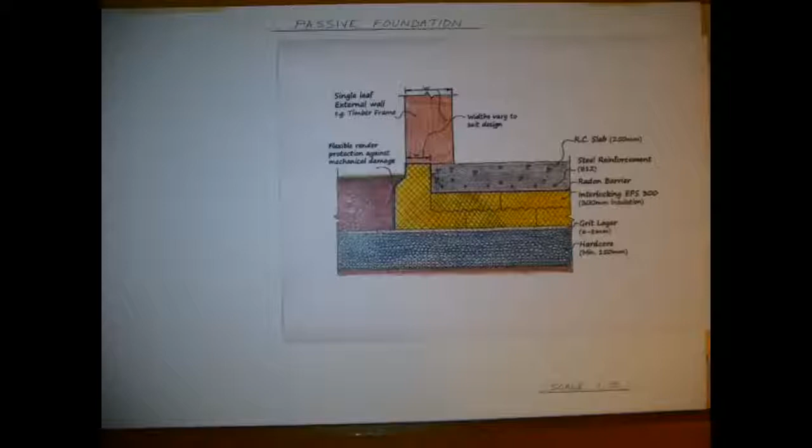In this video I want to take a look at how we might go about drawing a passive foundation for a single leaf wall. The foundation that I'm going to draw here is based on the Isoquick passive foundation.

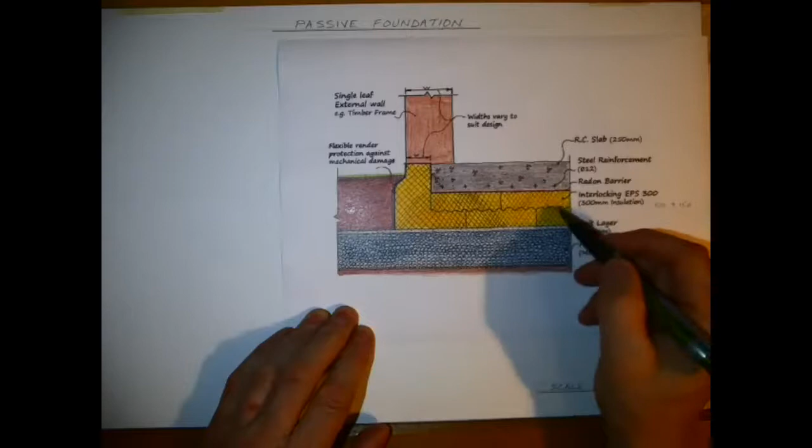You can see here it's got a layer of hardcore, minimum 150mm up to 300mm, which is what I'm going to use here, and a grit or blinding layer of 6 to 8mm, and interlocking EPS of 300mm in two 150mm layers. You've got a radon barrier, steel reinforcement in a concrete slab of 250mm, and a single leaf wall here without any detail, where the insulation comes to halfway on that wall, which is a 400mm wall.

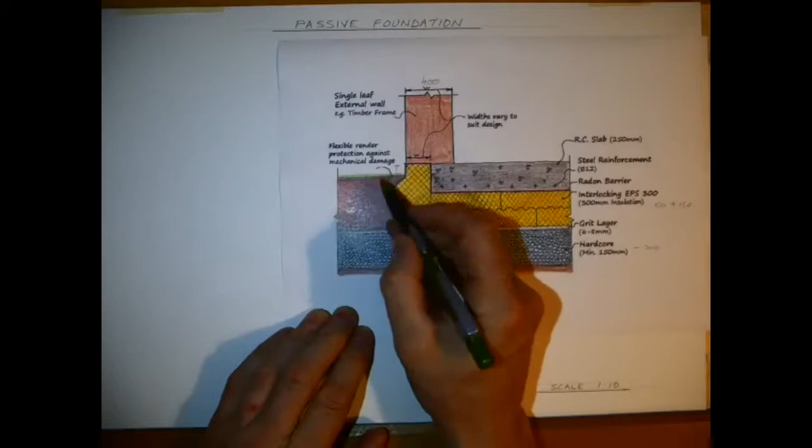At the edge here where the ground is, there's not much clearance to the radon barrier, so I'm going to increase that to 150mm. To start off with, I'm just starting from the ground layer, where I would put in my hardcore, which I'm putting in at 300mm. So I've got two 150mm layers, and then I've got a 250mm layer.

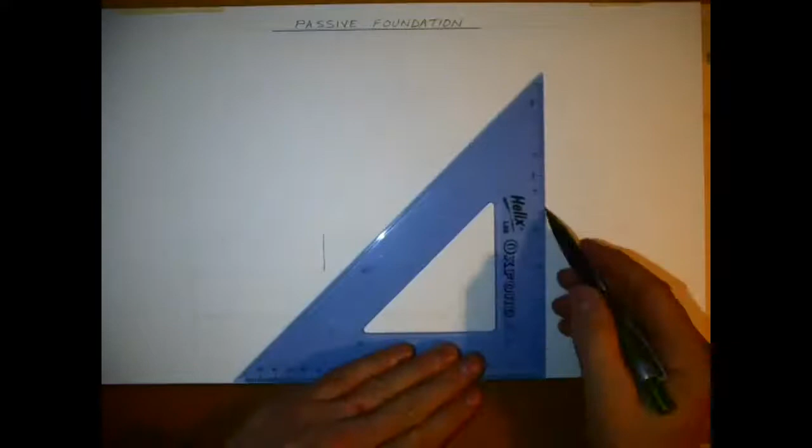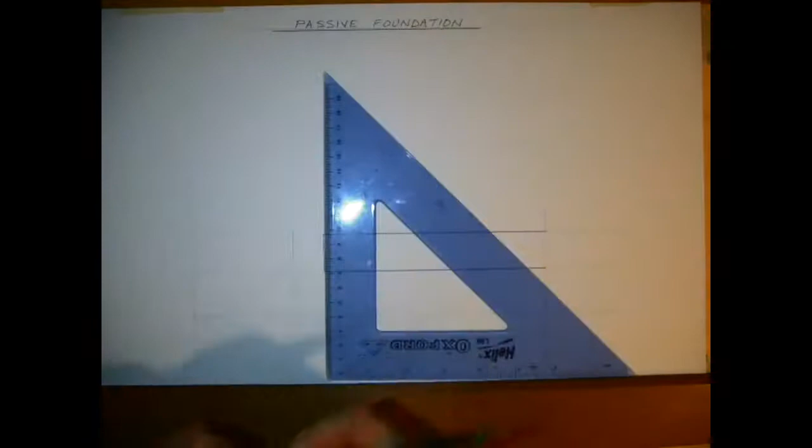What I'm doing here is drawing where the center line of the slab would be on the wall, measuring over 1500mm at a scale of 1:10. Then I can center my wall, and I measure down 150mm from the top of the concrete slab, using a 45-degree angle to come out to a 300mm wide piece of EPS shaped like that.

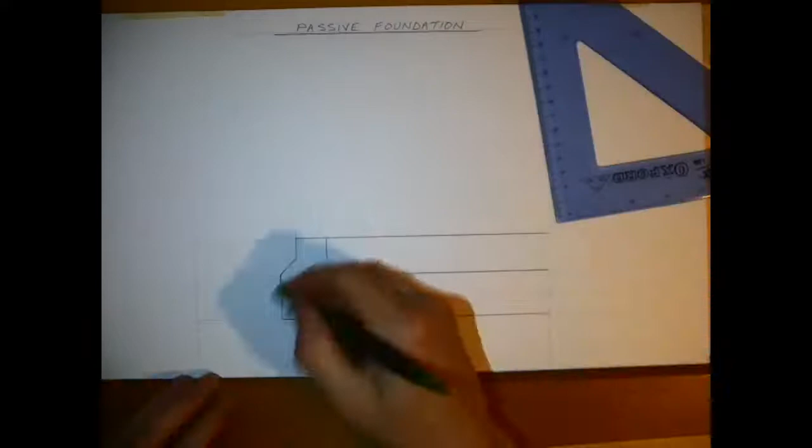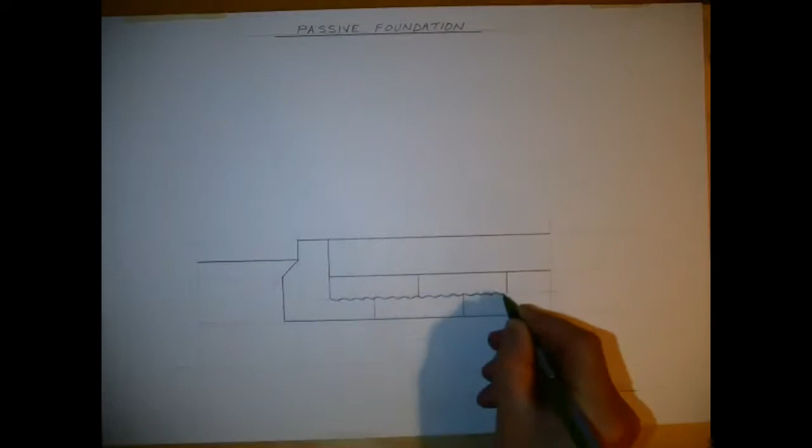So then it's just a center line really for the interlocking part, and that line I figured out was the ground line, which is 150mm now above the DPM. These interlocking pieces of EPS I've made 600mm wide, roughly around there, with a squiggle line showing that it's interlocking. If you wanted to go to the trouble of hatching it, you could.

There's a blinding layer below that, and below that again you would have your hardcore layer. So all I'm drawing in here now is the spacing away from the edge with the reinforcing bar. I'm sure in deeper slabs you would have reinforcing bar possibly at a higher level too, making it a kind of cage, which would improve its strength.

And I'm bringing the wall up here as well to the 400mm wide wall, and as you can see it is centered between the EPS and the concrete slab.

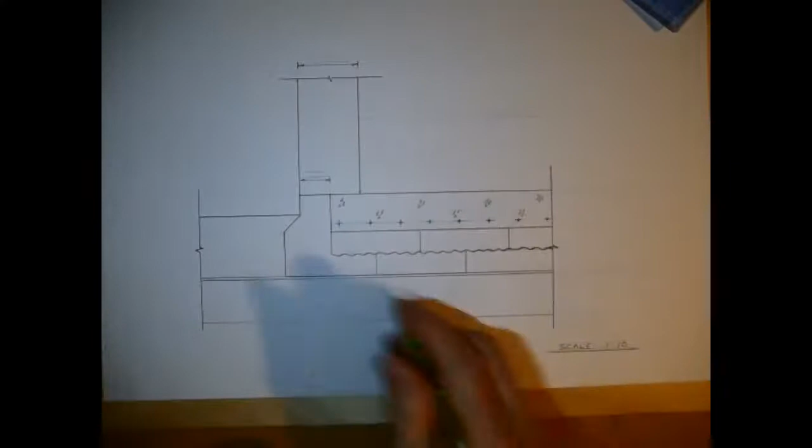There'll be variable designs in this, I'm sure there would be high levels of insulation, different types of renderings and waterproofing as well, and different types of walls. I would imagine the soil type would be a big bearing on using this too, depending on the loads. There'd be quite a bit of calculations carried out to ensure it'd be capable of carrying the weight of the superstructure.

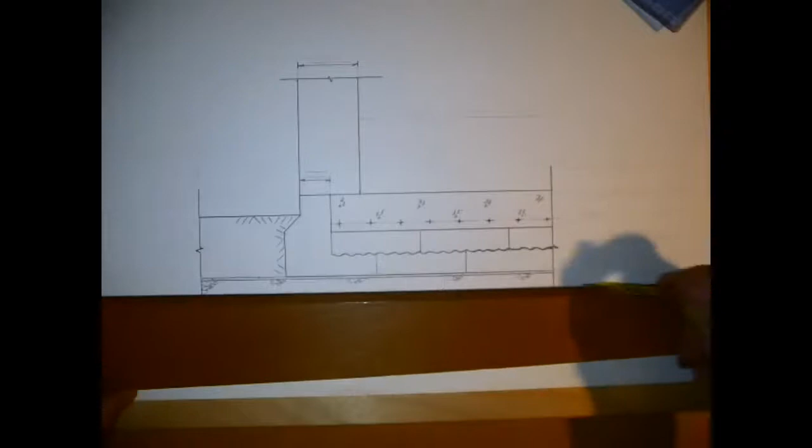The details here as I've sketched in show the concrete for the concrete slab, and rather than trying to do a whole load of little pebbles showing the hardcore, I've just done them sparsely. You can see I've also highlighted the ground that has been placed on. Here I'm indicating the radon barrier with a red pen just to make it stand out a little bit more.

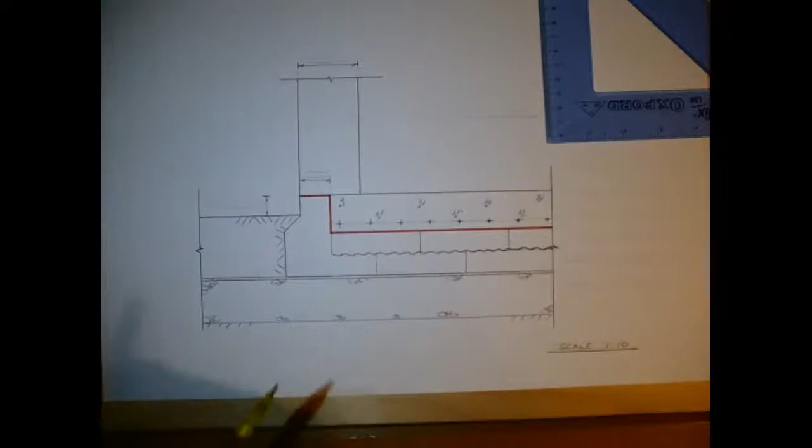With the 150mm upstand up to the DPC, or where the DPC would be, the DPM has now come out.

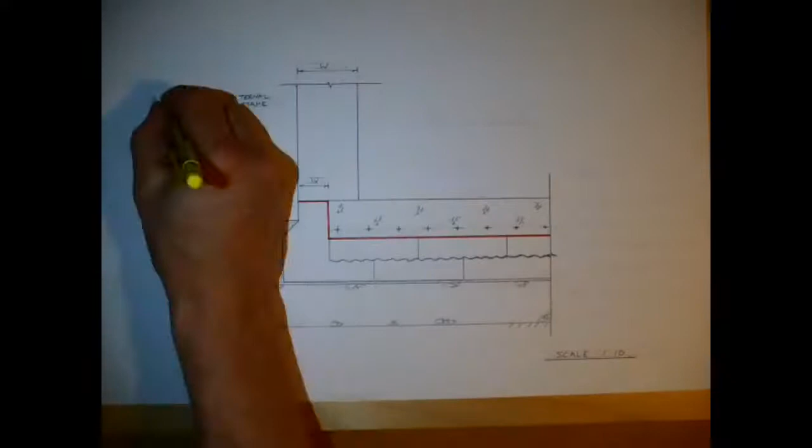So then just the details: single leaf external wall, for example timber frame, flexible render which is placed on the outside of the EPS, in which the concrete slab has been poured, just to prevent any mechanical damage. The widths in the wall may vary depending on the design.

Reinforced concrete slab, which I have in as 250mm, steel reinforcement bars of diameter 12, our radon barrier, interlocking EPS at 300mm so it's in 150mm layers, 2 layers, and our blinding or grit layer, which is only 2-8mm, and then the hardcore.

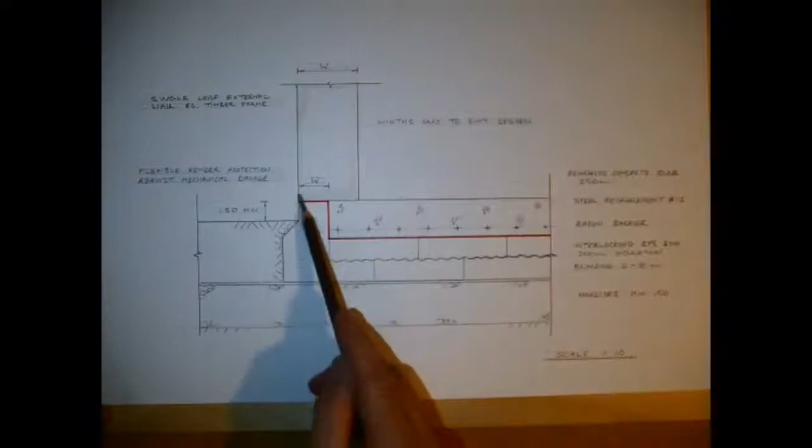All I'm doing here now is putting a little bit of colour just to make it stand out on the page. I'm sure that the ground here could actually be dropped a bit more as well.

The only issue you may have here would be if there was a possibility of tanking where water would get in underneath the EPS. I suppose it would depend on ground conditions and that sort of thing.

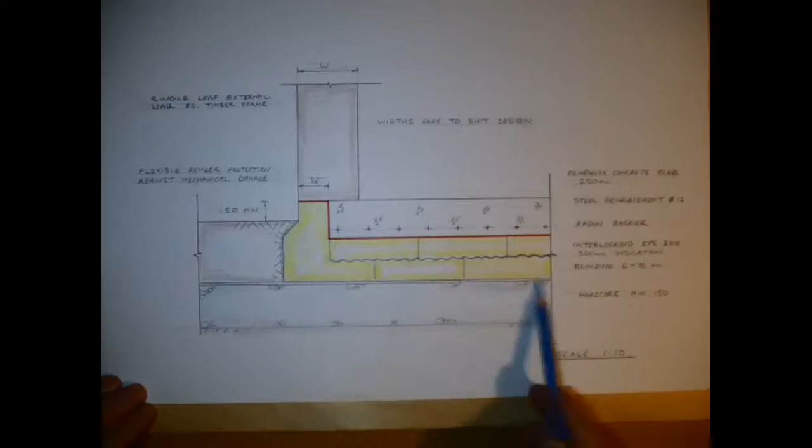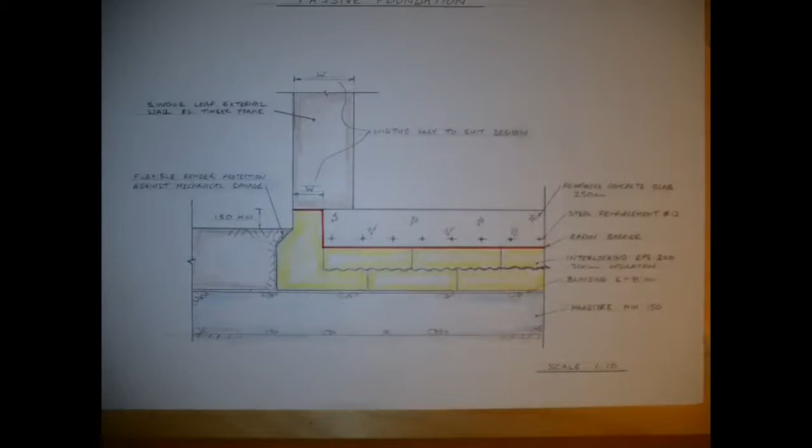This is just a preferred solution to drawing a single leaf wall passive foundation. There's other ones like the super ground where the insulation has got fastenings or fixtures between them, and the other passive foundation I've drawn is for a double leaf wall, whereas this one is single, but it looks quite effective. So hopefully that's a help.